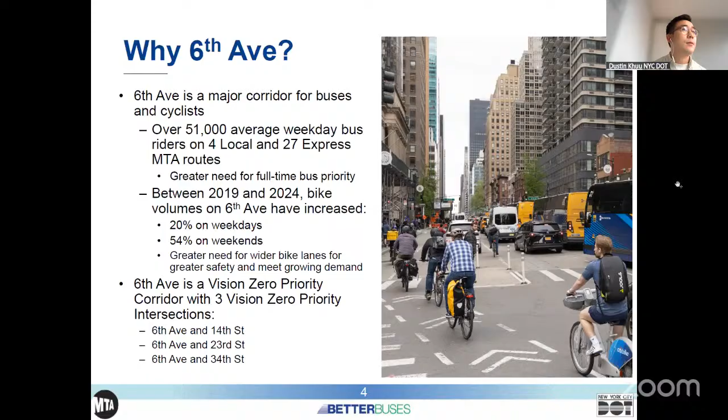As I mentioned, safety is a huge component of this project in our considerations. Sixth Avenue ranks in the top 10% of streets with most people killed or severely injured per mile. Between 2021 and 2025, there were a total of 978 injuries, 87 of them were severe, and 3 of them resulted in fatalities.

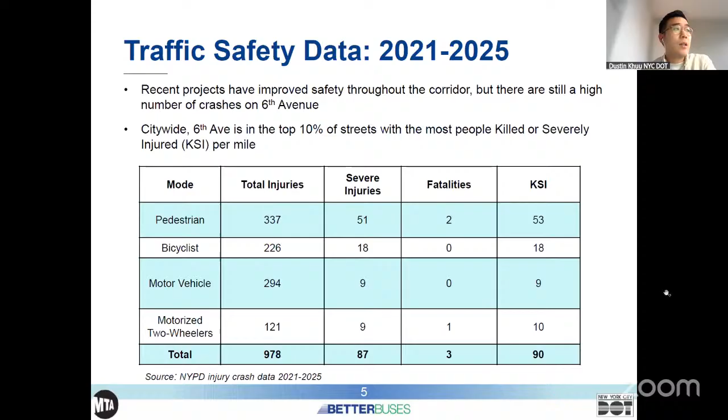That brings us to the goals of what we want to achieve with improving 6th Avenue in this project. We want to improve bike lane and pedestrian safety, accommodate growth in cycling, and provide space for new types of bikes, different sizes and speed differentials. We want to remove mixing zones and upgrade to offset crossings, creating pedestrian islands that shorten crossing distances and slow turning vehicles. And we want to find opportunities to install bike corrals and planters wherever feasible.

For the bus priority portion, we want to prioritize transit in this very critical transportation corridor and increase bus speeds and reliability for 51,000 average daily riders.

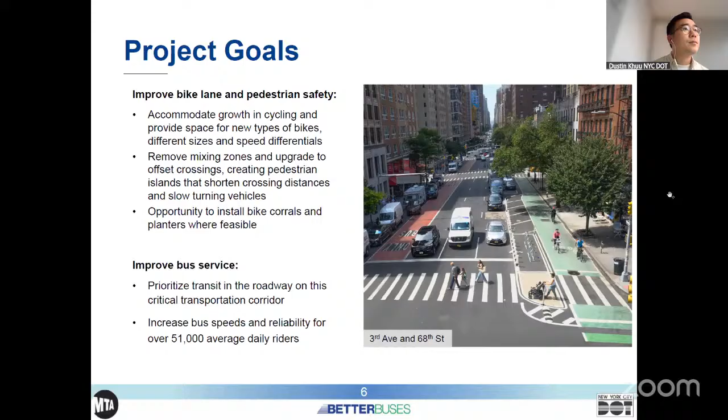There's going to be a lot of information in the proposal, but this is just to summarize the full scope of the project. We are proposing to extend the bike lane widening from 35th to 59th Street. The original bike lane widening proposed last year is currently in implementation, from 13th Street to 32nd Street. We are proposing new bus lanes from Watts Street all the way up to 58th Street. On blocks where the bus stop currently takes up the full length of the block, we want to propose double bus lanes to allow for better maneuverability for the bus. Within this full project area, we are looking to propose bike corrals and planters to really improve that public realm and safety for pedestrians.

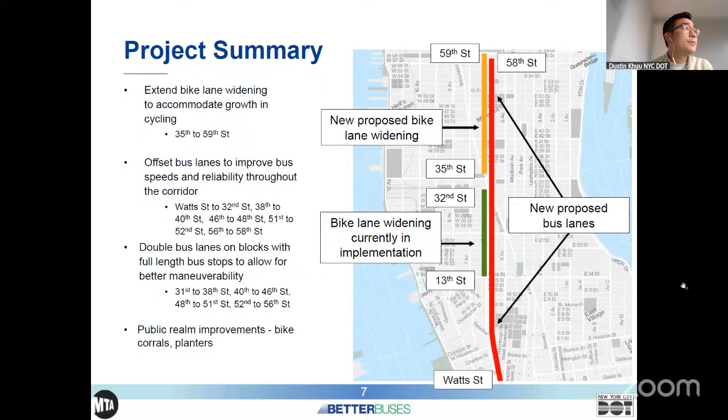Now I'll pass it to my coworker Preston, who can talk about the existing bike lanes currently in implementation. Hi, my name is Preston Johnson. I am a project manager within the cycling and micromobility unit. As Dustin mentioned, the protected bike lane widening project between 13th Street and 32nd Street is being implemented right now.

As you can see from this photograph, the new white lines have gone in, and you can see where the old lines have been removed.

As part of this project, we are upgrading the mixing zone left turn treatments, which had moving vehicles coming in across the bike lane in a way that a lot of people riding bikes found uncomfortable. We are upgrading that to what we call an offset crossing, which adds a pedestrian island, which you can see right there. It still hasn't been painted in yet.

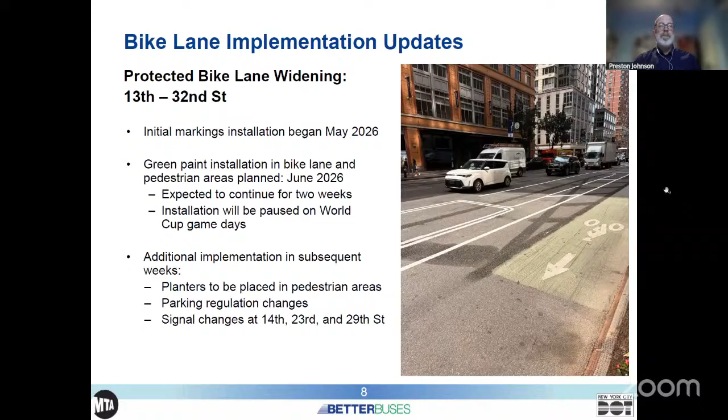Great, thanks Preston. So now moving on to existing conditions of what currently is on the roadway. I will quickly pass it back to Preston to talk about existing bike facilities.

As you're probably well aware, DOT has a long history of working on 6th Avenue. There have been bike lanes on 6th Avenue for decades. In 2016, we began upgrading the standard lanes that had been there for so long with protected lanes between West 9th Street and West 32nd Street. In 2021, that protected lane was extended northward to Central Park. And in 2024, we extended it southward from Lispenard Street.

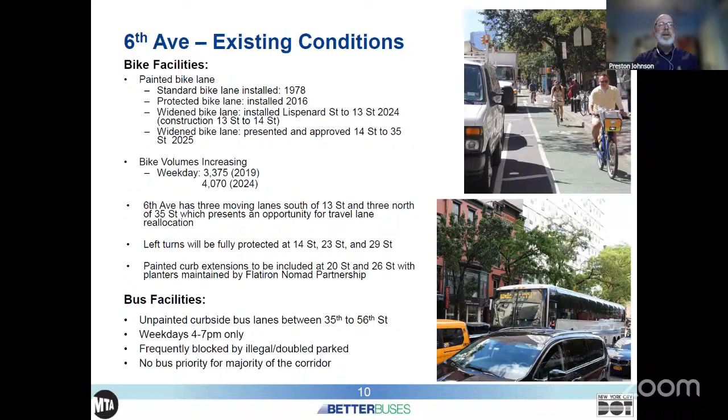In that segment, we also implemented a wider bike lane. Because we're seeing such high bike volumes along the corridor, that's a treatment that we would like to expand, beyond 13th Street, what we did last year, and beyond 32nd Street, what we're doing this year. We feel that the higher bike volumes and the wider cargo bikes mean giving a little extra space makes it a safer condition for people riding bikes. Thanks, Preston.

As I mentioned before, there are existing bus facilities on 6th Avenue. It's a very short stretch from 35th Street to 56th Street. They're currently curbside and part-time only, during the PM rush hour from 4 to 7 p.m. As you can imagine, they are frequently blocked by illegal or double parked vehicles. And for the majority of 6th Avenue, there is no bus priority, so buses are traveling in mixed traffic.

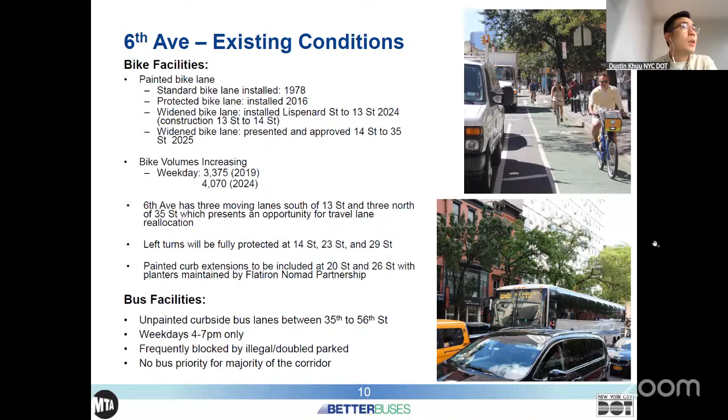So now I can pass it to my colleague Rob from the MTA to talk about existing bus speeds on the corridor.

Thanks, Dustin. So this map shows the bus speeds. On the right side, the solid line represents the speeds for the local buses, and the dashed line is the speeds for the express buses. Generally, the darker the line, the slower it gets. The speeds are slow overall, but they get slower as you go north, especially between 14th Street and 59th Street. They go as low as 3.5 miles per hour for local buses and 4.2 miles per hour, still not very fast, for the express buses in the PM peak period.

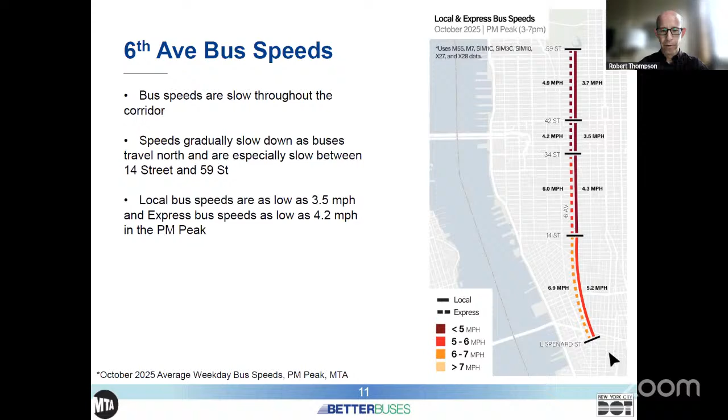If we go to the next slide, this slide is showing the ridership at all of the stops, combining express and local boardings and alightings, or ons and offs, with larger circles and darker colors representing more people using a stop. You can see there are more people in general north of 14th Street than south of it, and the ridership is concentrated at the major cross streets, where also the subway stations tend to be, at 34th, 42nd, 50th, and 57th.

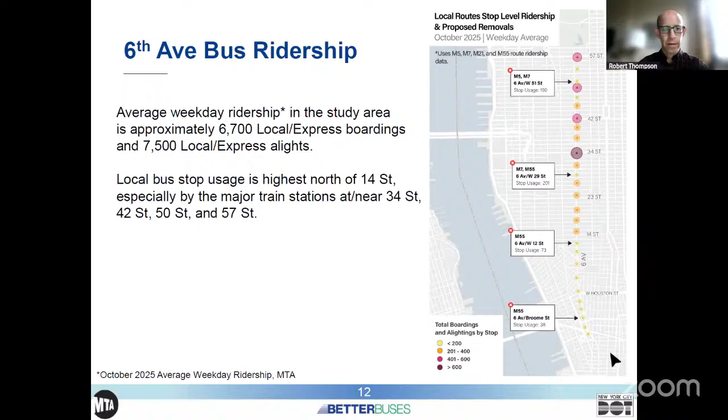If we go to the next slide, as part of this project, we are proposing... oh, I think that's a few slides later. Okay, we'll get back to you in a bit, Rob. Thank you. But yeah, now we can go into our proposal.

I have slides specific to the CB5 area of the project. Between 14th Street to 32nd Street, the bike lane widening is currently being installed, as Preston mentioned. The new treatment we're proposing here is to convert the rightmost travel lane into an offset bus lane. With the combination of the bike lane widening and the offset bus lane, we would be reducing the travel lanes from 4 lanes to 2 lanes. We would be maintaining curb access where it exists today, so we're not removing any parking as part of this proposal.

We are also proposing left turn calming treatments at the following intersections: 6th Avenue at 15th Street, a left turn calming treatment on 16th Street turning onto 6th Avenue, and more left turn calming treatments at 17th, 19th, 21st, 25th, and 31st Street.

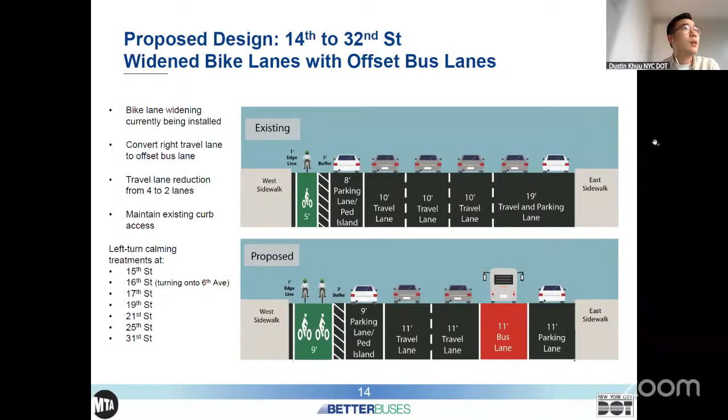So moving north between 32nd Street to 34th Street, this is where there's an existing two-way bike lane. We are not proposing any changes to the existing bike infrastructure here.

Between 34th and 35th Street, there is a single northbound bike lane that remains unchanged. What we want to propose here is a double bus lane, and to maintain those 2 travel lanes further south of 32nd Street.

Moving north of 35th Street, what we're proposing here is to widen the bike lanes by reducing the 5-foot buffer to 3 feet. This allows us to widen the bike lane without removing additional travel lanes. We are proposing offset bus lanes as well and maintaining existing parking and loading spaces where they currently exist.

On a number of blocks north of 35th Street, the bus stop takes up the full length of the block because there are so many express buses and local buses that stop there. We are keeping those bus stop lengths the same, and on those blocks, installing double bus lanes to allow for greater maneuverability while maintaining those 2 travel lanes throughout the full project length. These blocks with full length bus stops are between 34th Street to 38th, 40th to 46th, 48th to 51st, and 52nd to 56th.

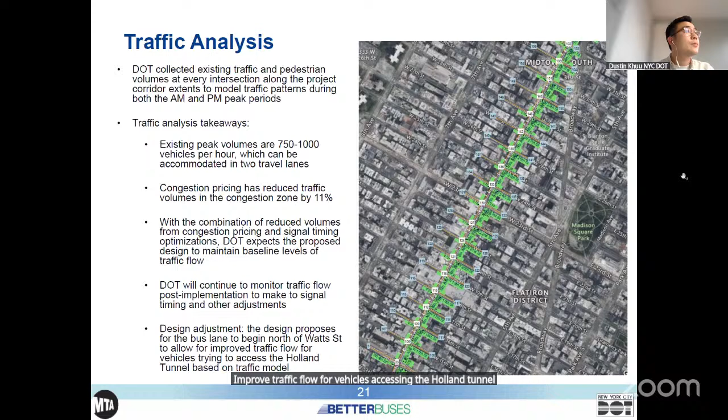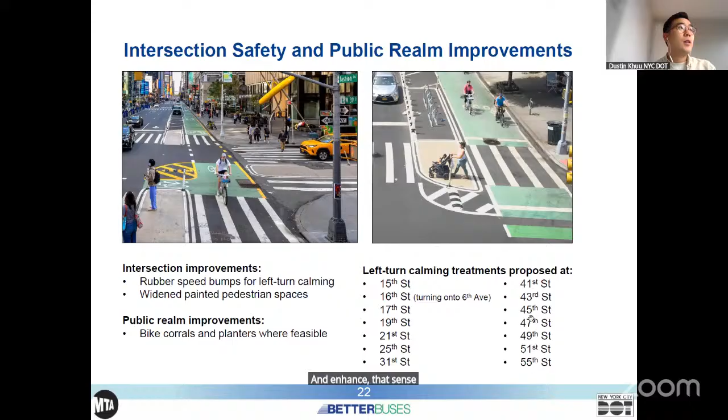This is just an example of the pedestrian safety treatments I mentioned earlier, so you can see them more visually. These are examples of rubber speed bumps for left turn calming treatments, as well as widened pedestrian spaces. There are painted pedestrian refuge islands to help create more separation between cyclists and pedestrians. As Preston mentioned earlier, we will be proposing bike corrals and planters wherever feasible to improve the public realm and enhance that sense of safety and security.

Just a quick note on curb management. I mentioned that we are maintaining the curb access spaces wherever they exist today. We are still exploring updates to metered parking regulations to improve commercial vehicle access and greater turnover, especially where there is a high concentration of businesses.

Going through summary and next steps: the implementation of the bike lane widening proposed last year is in progress right now between 13th Street and 23rd Street.

During the rest of this month, we are presenting the new bike lane widening as well as the new bus lane proposal to the community boards. We do hope to begin implementation in the fall of this year.

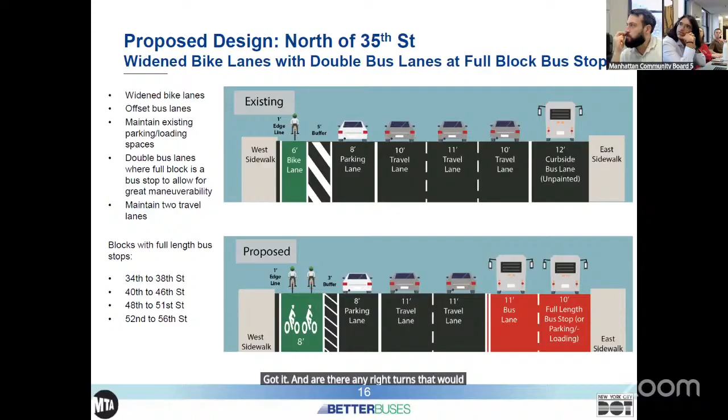Okay, yeah, I guess my comment would be that I have concerns about allowing other vehicles to get in the bus lane at all because it could lead to congestion. I think at least one of the routes along the corridor was going to be camera enforced - is that right, MTA?

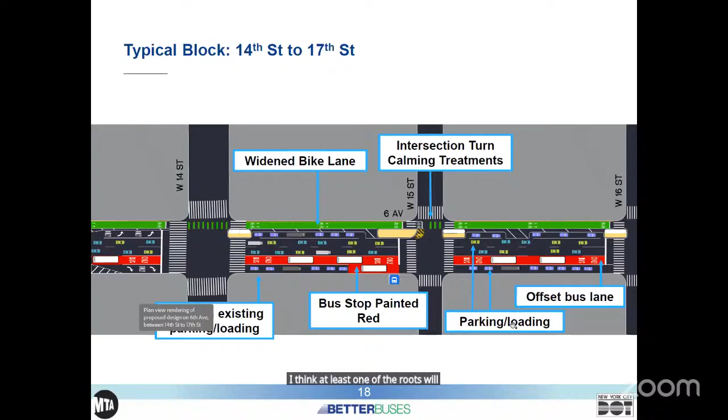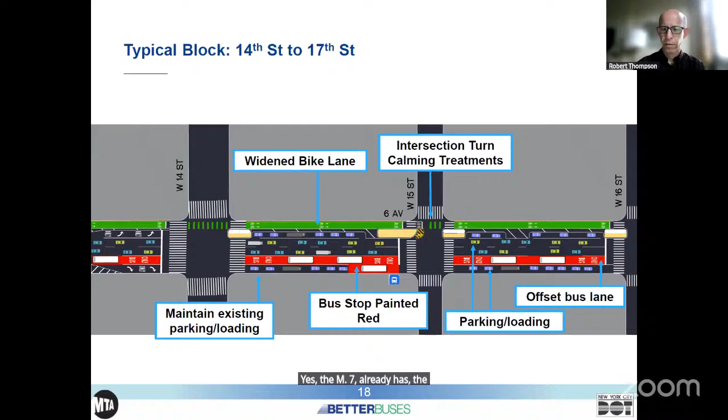Yes, the M7 already has the camera enforcement system up and running. Right, but that's only if you're double parked or something, right? If you're legally taking a right turn, you wouldn't get a ticket - like if there's just a lot of cars that want to take a right turn, and you're backing up into the bus lane. Right, that's true - if it's a legal turn, you won't get a ticket for it. So we can look at the traffic model again to see if it makes sense to ban certain right turns at certain intersections. We do have to balance that with people being able to access the streets, so we can take a closer look at that.

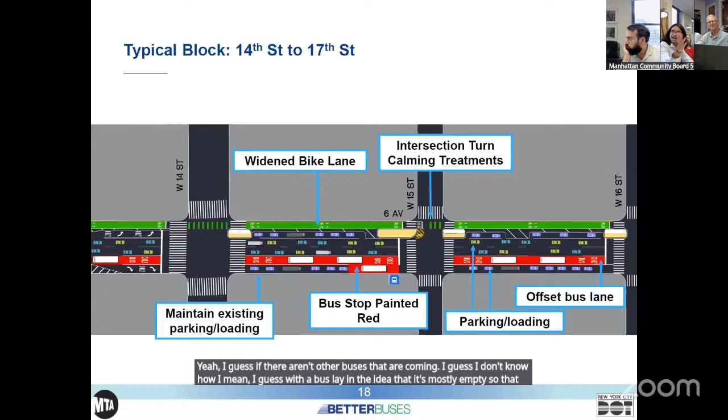Thank you. I mean, if there was congestion at the curb lane, couldn't buses go into the offset lane to get past it and then go back? Yeah, I guess if there aren't other buses coming. With a bus lane, the idea is that it's mostly empty, so buses can go fast when they come through - so if there's space, then yes, but I wasn't sure. And on the previous slide, which I didn't realize, almost all of this area is full-length block front bus stops, so you basically have continuous coverage for most of the zone - it effectively operates the way you'd think for most of the zone. Got it.

Okay, Charlie. You already answered a bit of the question, but I wanted to ask about enforcement. So it sounds like the M7 already has ACE. Is there a plan to roll out automated camera enforcement to other lines along this corridor?

Kate, if you're on, would you take that? Yep, I can take that one. Right now we're focusing on corridor level enforcement so that we can deploy this system as broadly as possible across the city. The M7 is a pretty frequent bus, so if two consecutive buses a certain number of minutes apart see the infraction, that's going to get the ticket. For now, we think that's an appropriate level of enforcement for the section of 6th Avenue that has the M7, but we're constantly monitoring it. We're working to roll out more routes across the borough and across the city, so if there are specific routes you'd like us to take a look at, we can take that back. But for right now, the M7 just launched - it went into full effect a couple weeks ago, and we're going to be monitoring it closely to see how that deployment goes.

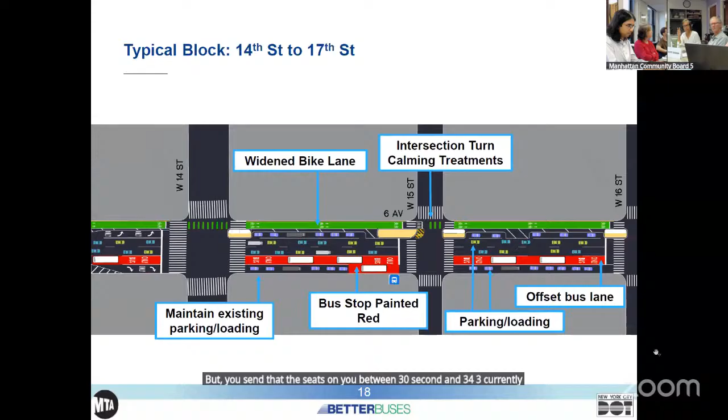Thank you, I have one more question. On the slide - I don't remember the number - you said that 6th Avenue between 32nd and 34th Street currently has 2-direction bike lanes in a 10-foot wide lane. So I just don't understand why. I always find this very dangerous - we're not used to looking in 2 directions when we cross the street on a one-way avenue. So I always find this section very alarming. Why is this there, when the rest of the avenue is all one direction?

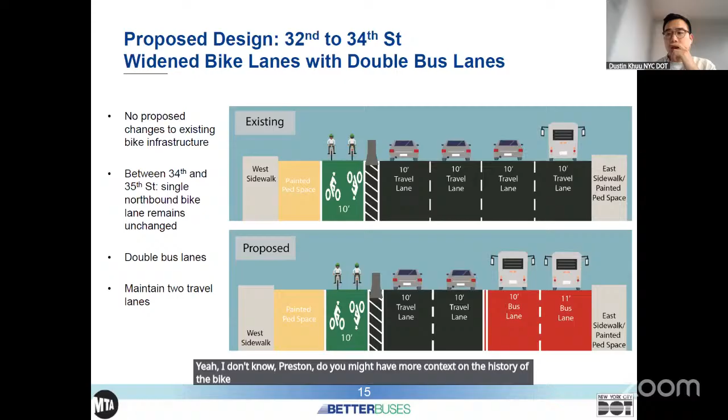Yeah, I don't know, Preston, do you have more context on the history of the bike lane here? We didn't really change the existing condition of the bike lane at this location. I think there's just a lot going on with Broadway bike lanes and 6th Avenue bike lanes, and currently this is sort of our best pass at creating a bike zone rather than two separate bike zones and splitting up the pedestrian space further. Your points are well taken, and it's always a challenge dealing with a two-way bike lane on a one-way street especially. But we look forward to making improvements as we see the opportunity to. This is kind of where we are right now.

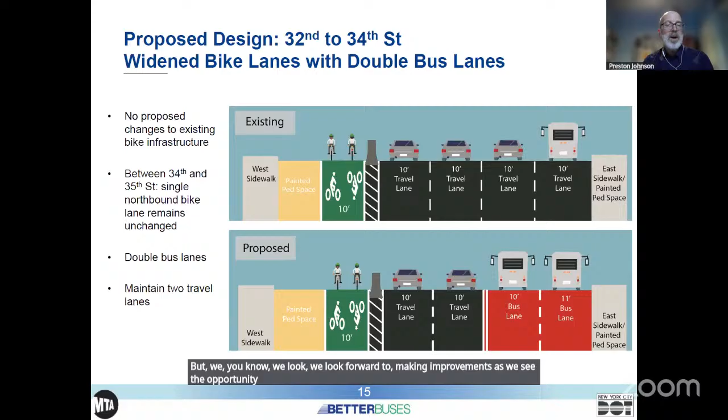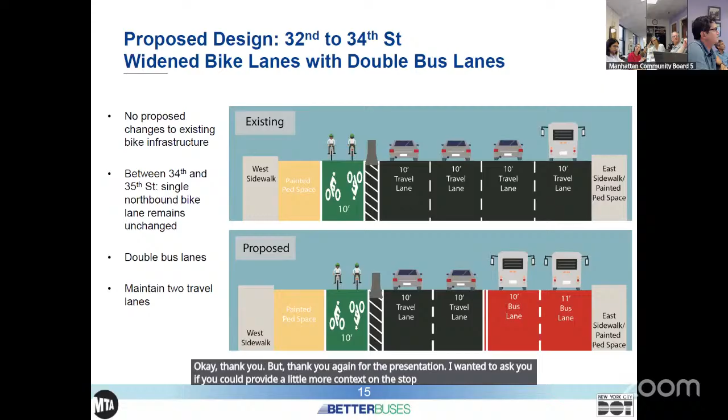Okay, thank you. Thank you again for the presentation. I wanted to ask if you could provide a little more context on the stops that you're proposing to close. I know you mentioned there were only 200 people on average who used those closures, but I wanted to inquire a bit more if you looked into who those riders are. My primary concern would be people with mobility issues, and have you thought about where they would go alternatively if that's a concern for those community members?

Yeah, what we have are on and off counts on the buses. It's very hard to determine the specific mobility of those actual people. But with these removals, you would still be within a block or two of a bus stop in one direction or another. And if we do this and suddenly get a flood of complaints saying there's a senior center we didn't know about and they're all using this one bus stop, we could always go back and revisit that if it is a particular problem at a certain location.

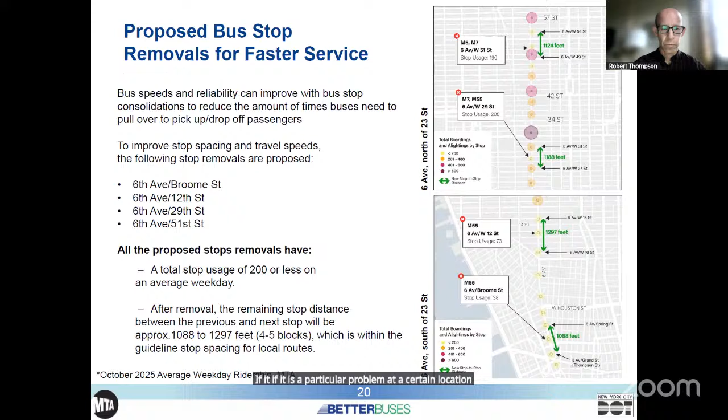So we all want to get the buses moving faster, and I think this is going very much in the right direction. Anecdotally, the double bus lane is a great advantage. Also the bike corral and speed bumps are terrific. Three questions. One that's really been asked already but I don't feel answered, and that's the mixing of one-way bike lanes and two-way bike lanes on one avenue. They're all two-way now, sometimes four or five or six ways. So that's an unanswered question, I think.

But two others quickly. We still have parking and loading lanes. Has there been consideration of really no parking, just loading lanes? We don't need to have cars parked on our streets anymore. So let me let you answer that, and then I have one more question about material safety after that.

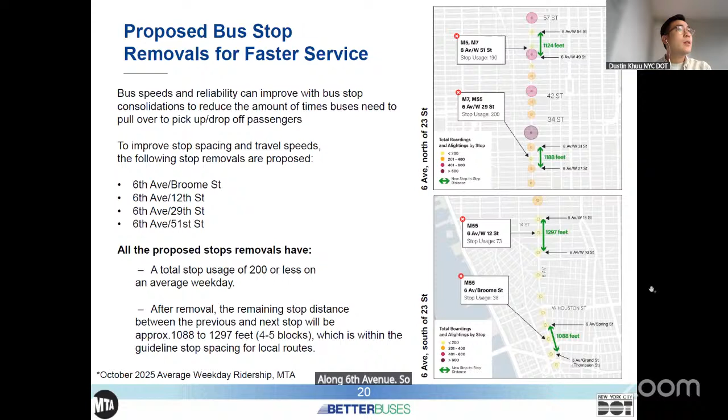Yeah, I'll take the parking loading question. I'll review the existing curb regulations, but from what I recall, I think it's mostly commercial loading along Sixth Avenue. So can we just go to the curb management slide. Yes, our parking unit is currently reviewing the land use and curb usage of all the existing curb access spaces along Sixth Avenue to determine the most optimal curb regulation to propose in the area, or to just leave it the same. As I mentioned, they're looking into a mix of 1-hour and 3-hour commercial parking only. As you mentioned, this is a super busy commercial corridor, so it makes sense that only commercial vehicles should be allowed to load in those spaces.

Thank you, Dustin. So just one other thing quickly. I'm so glad the mobility question was raised regarding removal of the stops. I don't see much of an issue though, because people with mobility issues do have Access-A-Ride to go to. But if you find that it happens to be by some particular clinic or senior center, that might be something to consider.

But last thing, Dustin - a lot of paint going down now, red for the bus lanes and green for the bike lanes. That's good. I'm just wondering, in terms of material safety, what kind of testing have we done here? Over wear and tear, weather - a lot of this is going to leach into the sewers. So what do we know about this paint?

Yeah, I can't speak specifically to the paint itself. What I will say is we use our standard citywide contractors who work in all 5 boroughs.

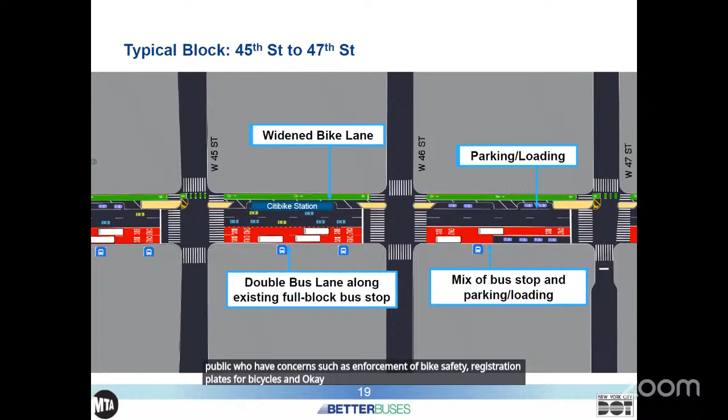Are the planters going to be all over the place, separating this bike lane from pedestrians, or is it going to be just wherever the budget allows it to be? And then my final question is, I would love to know from the presenters, when you come to meetings like this, are you also looking for members of the public who have concerns, such as enforcement of bike safety, registration plates for bicycles, and ways to slow down the bikes when they come to crossings? Because that's where I get the most issues, is when crossing the street. Some bikes unfortunately go through the red light. Are you looking for some of those comments, and does it help you if those comments are incorporated into any resolution or letter of support, or does it really not matter because it's an advisory committee and no matter which way they go, you guys are just going to do whatever you're going to do?

So I'm just wondering, how seriously do you take concerns of pedestrian safety, because unfortunately, I don't think this committee takes it very seriously. Thank you very much.

Yeah, thanks for your questions. I can start by answering a few of them. We really welcome your feedback and take pedestrian safety very seriously. This is all really helpful information to know. These concerns are things that we've heard before, and definitely things that we are taking into consideration for our projects.

I can answer the accessible pedestrian signal question. So whenever we do signal work at any intersection, those automatically get triggered for upgrades for pedestrian signals. I can maybe pass it to Preston to see if there is additional signal work happening as part of the bike lane widening portion.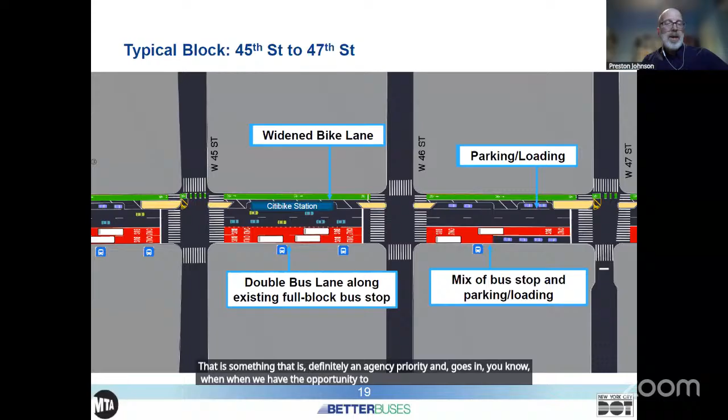So I don't have the information on the audio signals available right now. That is definitely an agency priority, and it goes in when we have the opportunity to, but I don't have the details on that right now. If there are signals along this corridor that aren't already equipped with APS that you know of, if you want to flag those, we can definitely take a closer look at them, and we can also let the relevant team know that we want to make sure they take a look at this corridor.

And then on the other question, as Dustin said, we definitely take the feedback seriously. Certainly the more specific and targeted, the better we can address it. CB4 mentioned the 23rd Street intersection in particular, that could benefit from some additional enforcement post-implementation. Dustin mentioned we monitor these projects after implementation to make sure things are flowing well. But we also work with our partners at PD, to the extent there are particular locations of concern. We also recognize that people have concerns about cyclists adhering to rules. We think that having wider bike lanes will also support the movement of cyclists along the corridor and minimize interactions with pedestrians. But certainly your feedback is welcome here as specifically as possible.

I'm just following up on that, with this graphic that's up now. So those extended pedestrian zones that I guess are shown in yellow, is there some material difference? Is there some way that somebody with vision limitations would be able to know that they're not in the street, they're in an extended pedestrian area?

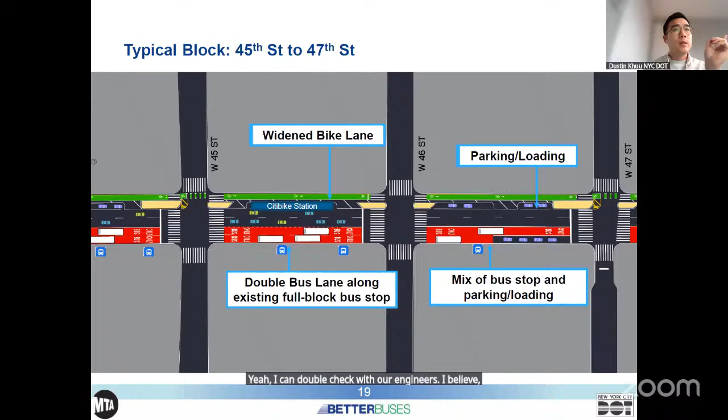Yeah, I can double check with our engineers. I believe some of them include detectable warning strips to indicate that there's an edge line. Okay, thank you.

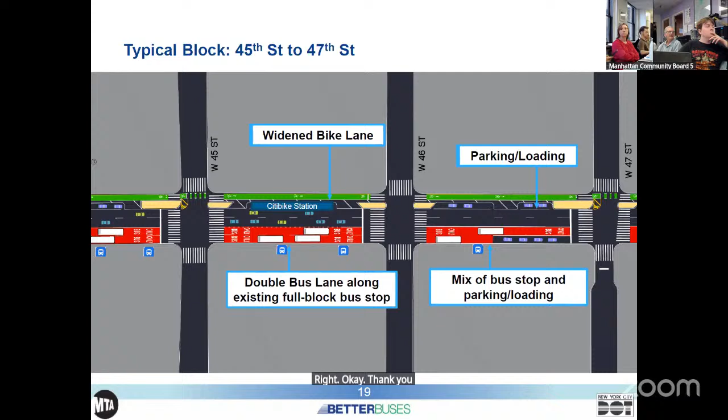Thomas? Hi, can you hear me? Yep, go ahead. Hi, Thomas.

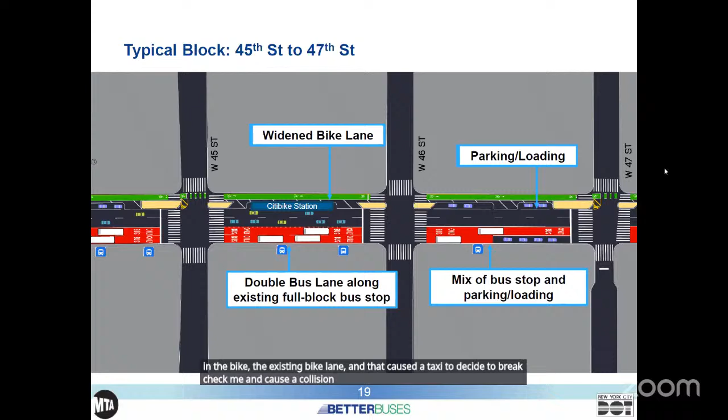I live on 29th Street between Broadway and 6th Avenue. Really excited about these changes. I've used that bike lane to commute to work downtown, and had to get into the street because of congestion in the existing bike lane, and that caused a taxi to brake check me and cause a collision with me. So I appreciate the widening and adding of the bus lanes. Hopefully this also does something for the incessant honking and the blocking of the intersections. Hopefully the elimination of one lane will decrease the sort of car sewer that 6th Avenue, especially in this part of Midtown, tends to be. So thank you very much for these changes, and looking forward to it.